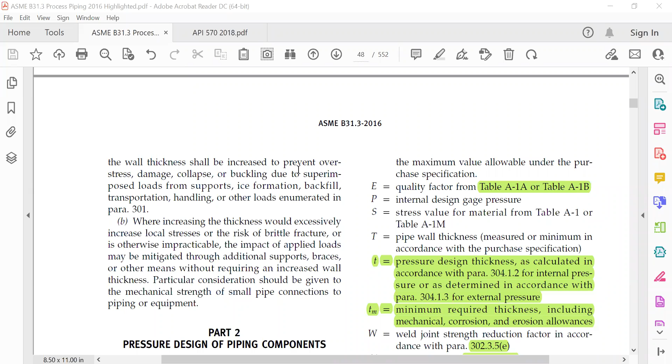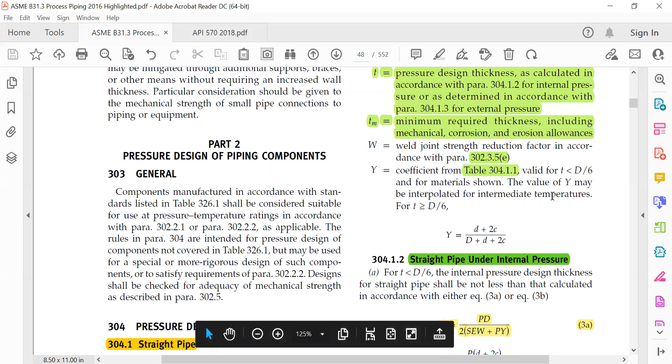B31.3 process piping, design of piping components. I will only discuss this as per API 570. I will not go further into more design details.

So for straight pipes, the required thickness of straight sections of pipe shall be determined in accordance with equation 2, that is Tm equal to T plus C. C is the sum of the mechanical allowances, thread or groove depth, plus corrosion and erosion allowances.

The minimum thickness T for the pipe selected, considering manufacturer's minus tolerance, shall not be less than Tm.

D is the OD of the pipe as listed in the table of standards, that is given as per code. What should be the OD?

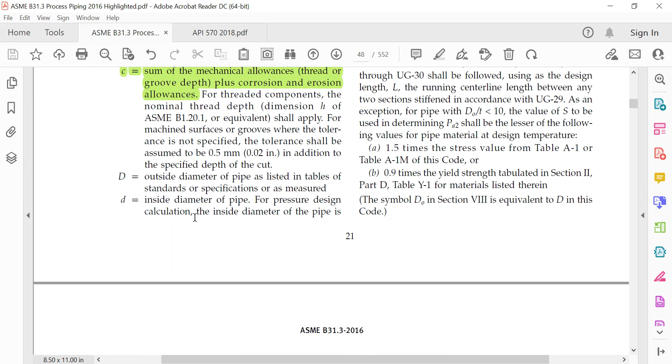d is the ID of the pipe. For pressure design calculation, the inside diameter of the pipe is the maximum value allowable under the purchase specification.

E is the quality factor from Table A1A or A1B, the quality factor for different types of pipes.

P is the internal design gauge pressure. Either you have to find it out, or it is given. If T is given, you find out P. If P is given, find out T. Depending on what should be the T and required T, you have to calculate from where everything will slowly follow.

But today I will mainly tell you the nomenclatures.

S is the stress value, and we can get all these things - stress value for material from Table A1, Table A1M.

A1 is for the American system, and M is for metric system. A1M means A1 for like KSI, and here it means for inch - it is for metric system.

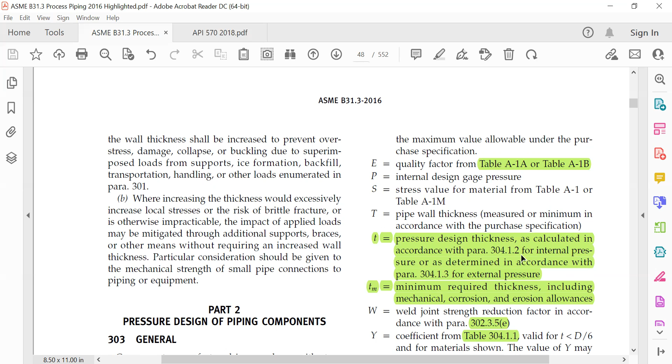Or as determined in accordance with para 304.1.3 for the external pressure. So this is 2.

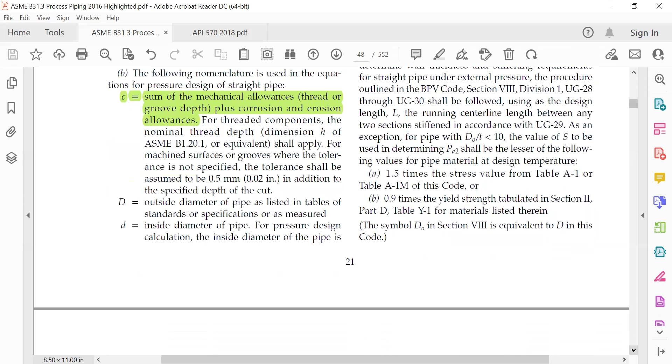We'll see what is in the external pressure - 1.5 times the stress value, so 0.9 times the yield strength tabulated in Part D. So for what we'll see.

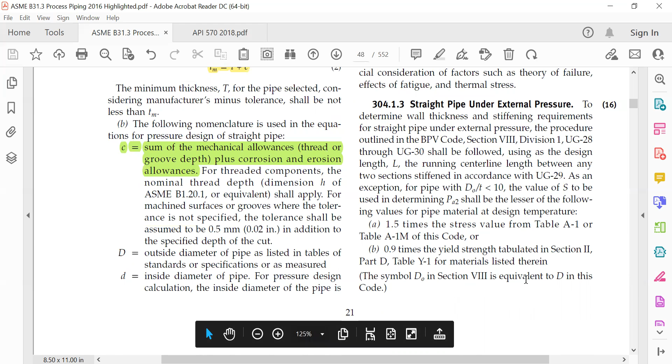Then what is Tm? Tm is, let's say, the minimum required thickness, including mechanical, corrosion and erosion allowance.

W is the weld joint strength reduction factor in accordance with para 302.3.5(e).

So if you see from here, you see here it is 47, or you see 20. So whatever you can remember depends on you, how you want to see it in the exam, because it is open book. Open book, you need all these things.

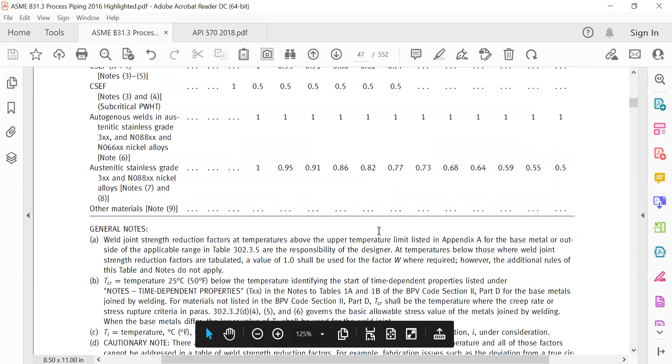You have to calculate it in minimum time. So it is up to you how you want to use it. Either you see that 47 or see this 20 and use it, because there is no F key you can use there in the exam.

It's Control F you cannot use. So weld joint strength reduction factor, that is W.

So it depends on what you are looking for and what is the temperature. There is temperature, if you see, and what is the material. And if it is in between, you can just add and divide, make it for the center. So that is what the code says.

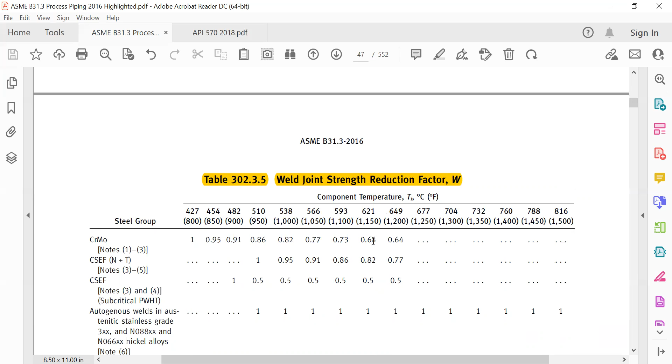This means using algebra only, like if it is in between this, so you can find a number between these two. Let us see - the weld joint strength reduction factor W may be determined using linear interpolation for the intermediate temperature values.

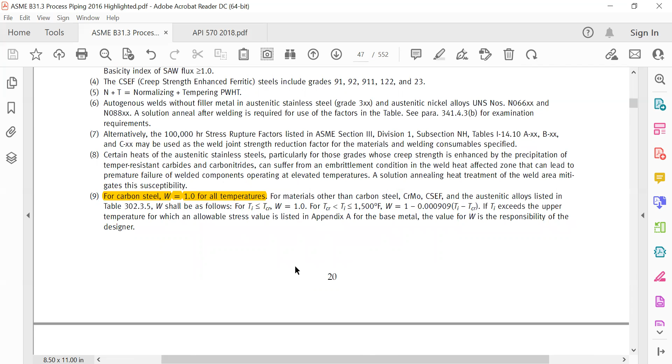For carbon steel, W is 1 for all temperatures. You don't have to see the table and all. If carbon steel is written, just put 1.

Y, the coefficient from table 304.1.1.

So you have to see Table 304.1.1, valid for T less than D by 6 for materials shown. The value of Y may be interpolated for intermediate temperatures, same as interpolated - so you can interpolate this.

For D, T greater than D by 6, Y equals D plus 2C over D plus d plus 2C. So there is a formula you have to use.

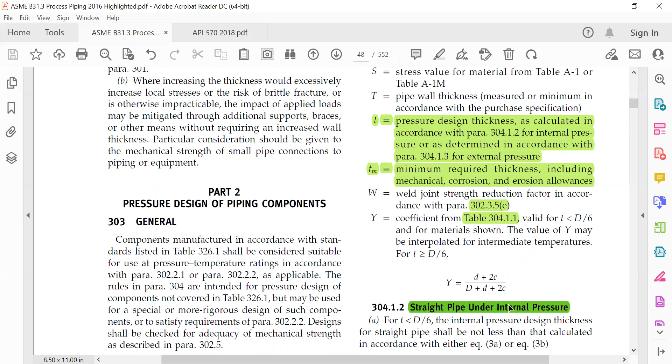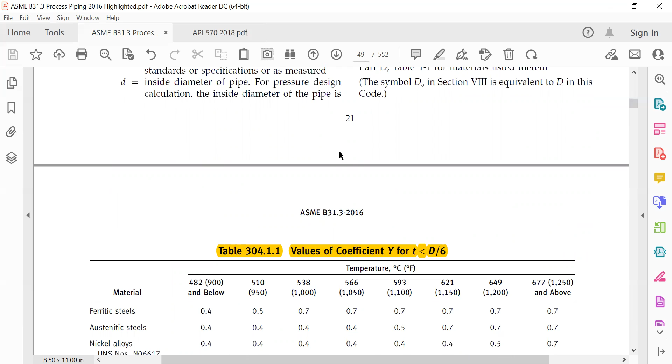So let us see this, 304.1.1. This one, the same 22, and this is 21. So 20, 21, 22, or 48, 49, 50, or 47, 48, 49. What you want to remember, that is up to you.

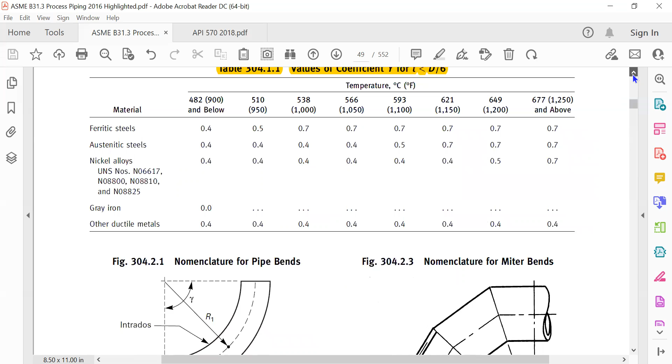So there is different materials, different temperatures, and you have value of Y, degree centigrade, Fahrenheit, everything given, less than D by 6. Other ductile metals, gray iron, nickel alloys, austenitic stainless steels, ferritic stainless steels.

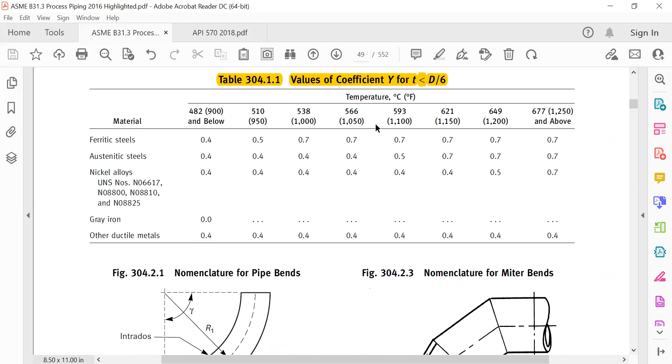So as per this, we have to put on these problematics. All problems can be solved with this formula here. Thickness or pressure. You need thickness, you need pressure. So you can use this formula only.

So T for T less than D by 6. Always you can find less than. It is very rarely greater than D by 6. So if it is greater than D by 6, then it is P by SE, greater than 0.385.

Calculation pressure design thickness for straight pipe requires special consideration of factors such as theory of failure, effects of fatigue, and thermal stress. For this, we are using this one, like T equal to PD by 2 SEW plus PY whole. So that is the equation what we have to use for our calculations.

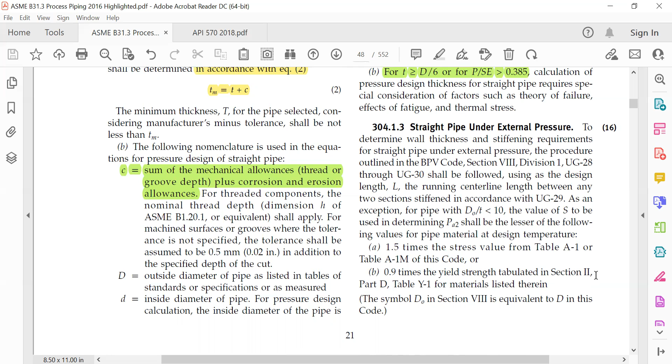1.5 times the stress value for table, take this, or 0.9 times the yield strength tabulated in Section 2 Part D. So this we are rarely using, but this is we are using very much.

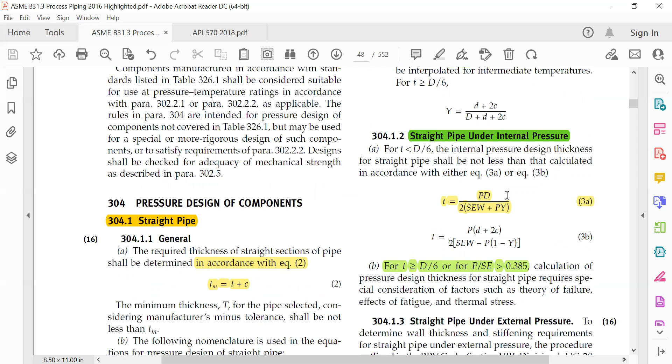Then where you get this S, let us see. E and S. So for E that is this table, and for S there is this table. So these two tables you have to follow. E is only quality factor, so...

Different seamless one, and there is other things there. So the page number you have to remember. I will just go there. I think the first one is this. So let us see.

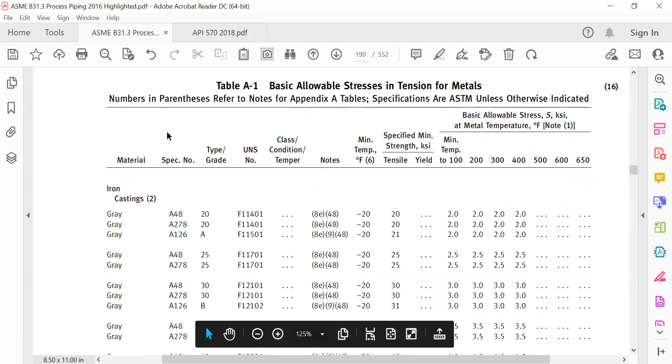Allowable stresses and quality factor for metallic piping and bolting materials. So it is starting from 182, but there is another thing also you have to see. Basic allowable stresses in tension for metals. So there are these are for castings. So if you are using casting, different things are there. For metals, this is A1.

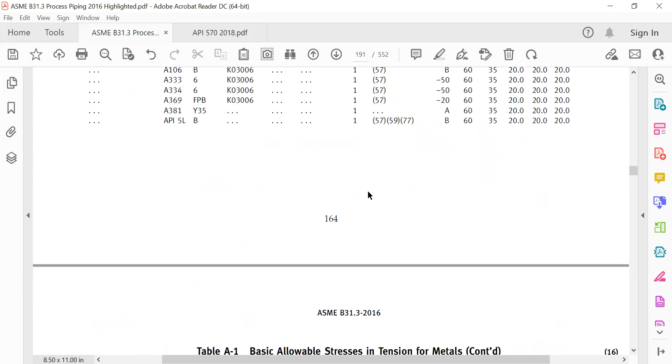So starting from 191, if you see here, or if you see here, 164, that is, you see time this, go to the next one. Basic allowable stress S KSI at metal temperature degrees Fahrenheit. So you can get in degrees Fahrenheit in KSI. So into 1000, this into 1000, what you get here as per temperature.

So there is a good thing about this here in this Fahrenheit scale. Now, this table is this here. It is written carbon steel and all this. The grade specification number. It's all this given, P number. You have to follow, and you find out something.

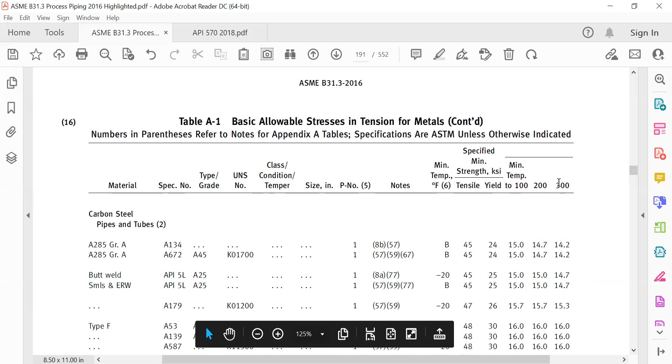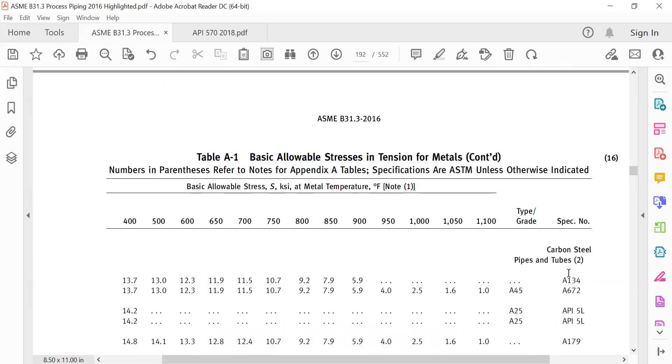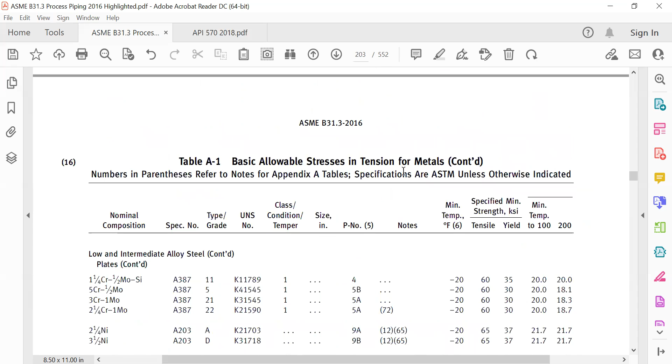Then the next is 200, 300. Then it is going for 400 here, and the same specification it is continuing, so that you can see there is a first page, there is a second page. Then you go to the next, MKS unit. So that is table A1M.

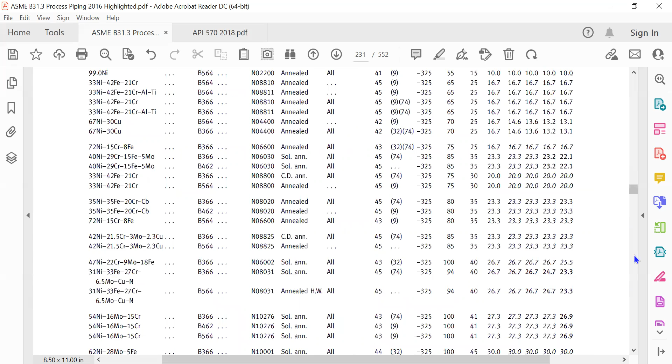So this is for basic allowable stress, tensile metals, metric. This is S in MPa, megapascal, in degrees centigrade.

This is in megapascal, basic allowable stress megapascal. So if you want to do Pascal, you have to do 10 to the power 6 and all.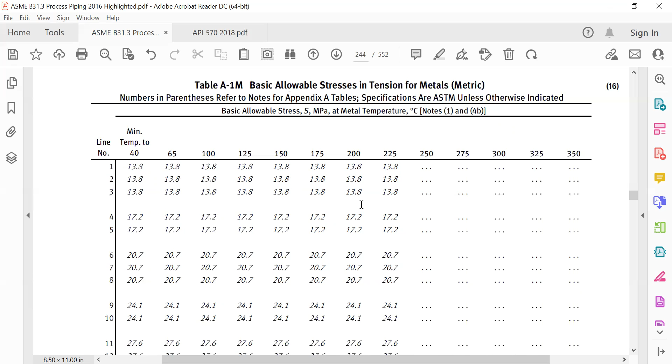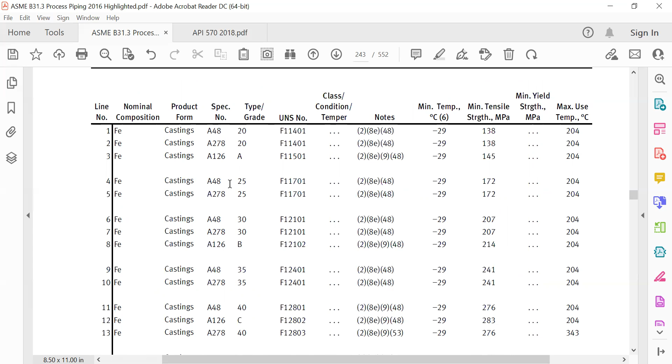See here the difference is something there, you can check it. Like we say start from here, 1. So this is for casting, but you can go on scrolling, then you get other things.

Like this is pipe and tube, you see. So there is 1 to all line numbers are there. So when you go to the next page, your line number will be there and other things you cannot find. That is the problem.

So minimum yield strength, minimum tensile strength, and the temperature. Maximum use temperature.

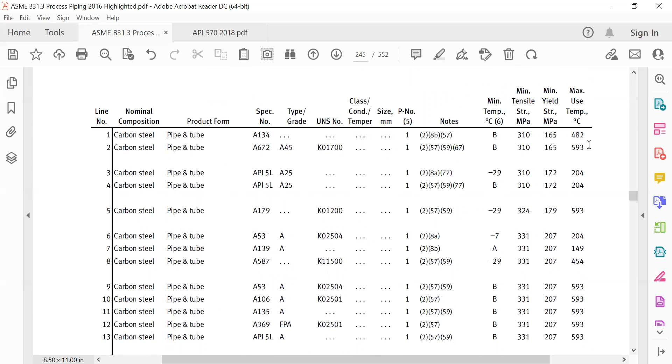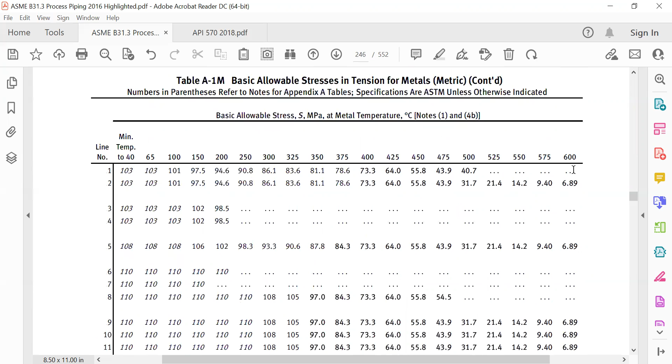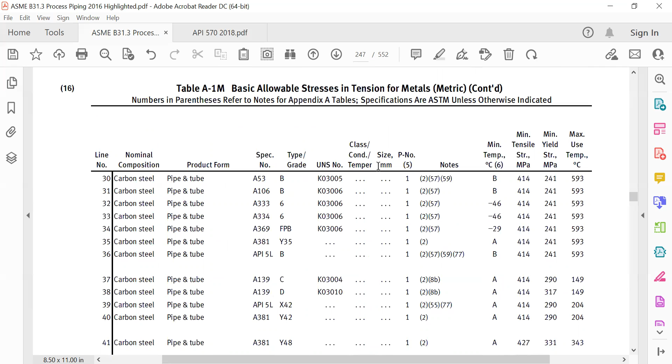So for that, if you go from here, same like that, page number means that serial line number 1, then you can search for these temperatures. Go on searching. So the next page you can see, so that is like that.

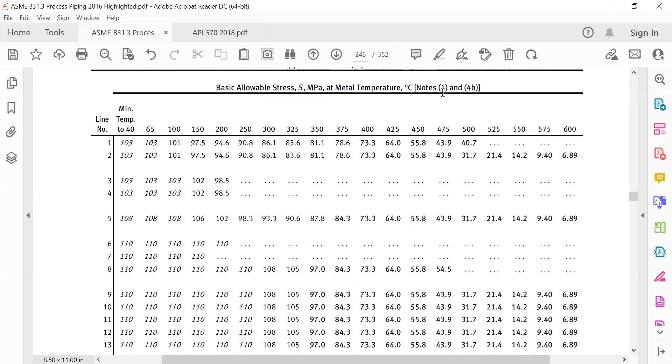So one page is for all nomenclature and all, and then the next page you go for finding out this MPa at metal temperature degree centigrade. So what you can use, you have to use...

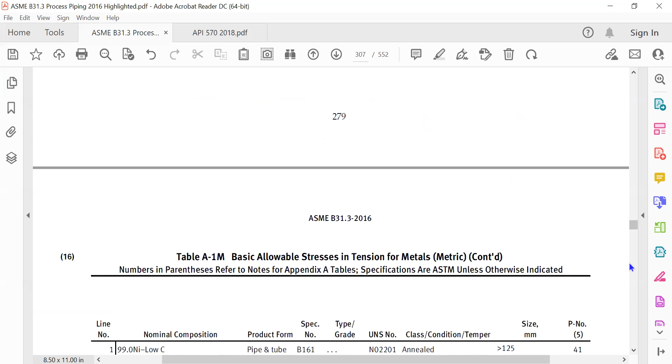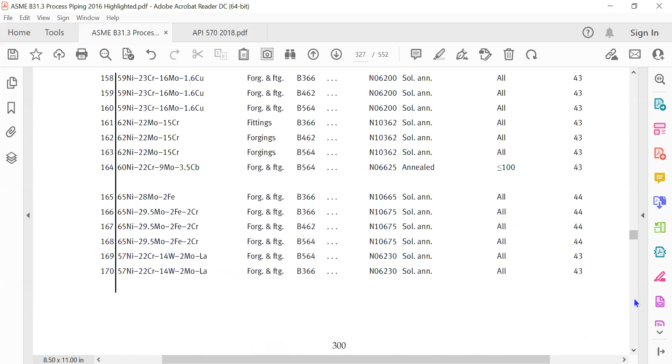So while we go through our calculations, we can understand better.

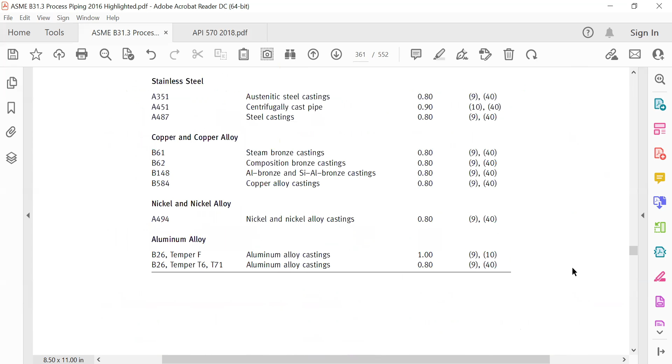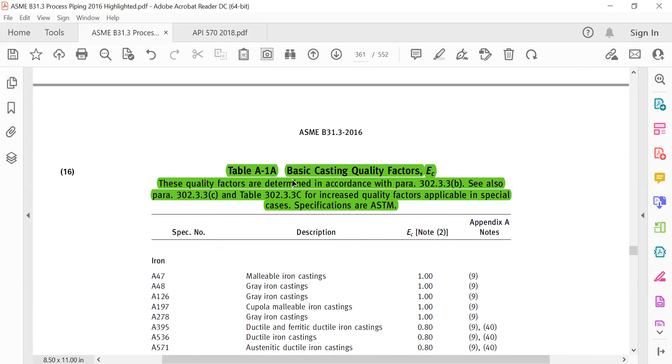There is basic casting quality factors, that is A-1A. You can read this page number 361, or you can go for 334. What you want to remember, you have to remember, so that it is easy.

So for me, it is better here. So once you remember, or write down to remember in the exam, it is better for calculation. Don't have to search.

And this is basic quality factor for longitudinal weld joints and pipes, Ej. For seamless, it is always one. So seamless pipe or anything, it is one. So don't have to bother with these things. But when electric fusion and all different grades, you look for that.

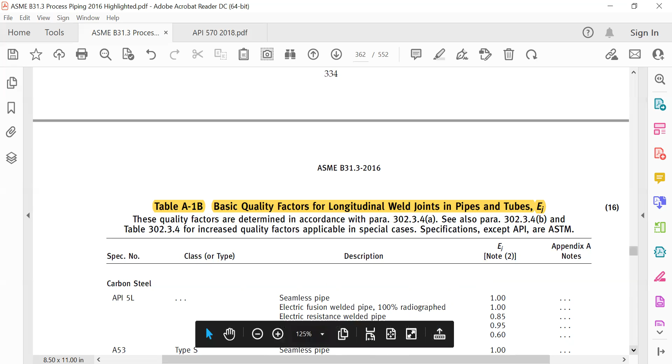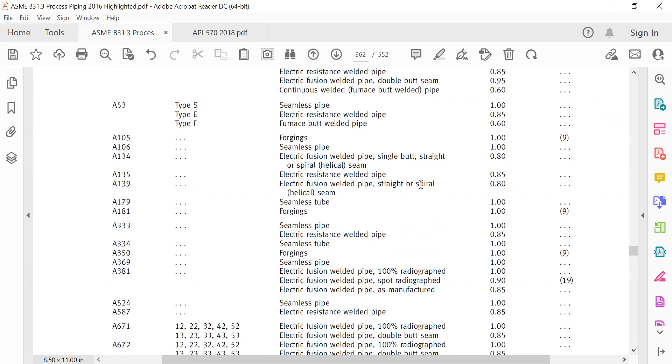So when you see seamless, it means it will be always one. Don't go for too much searching in the open book and all. So remember 361, and if you see 390, I think 391. Or 291, sorry.

So to find out all these things, and next we go for the other one. Let us not move too much around it. When we go...

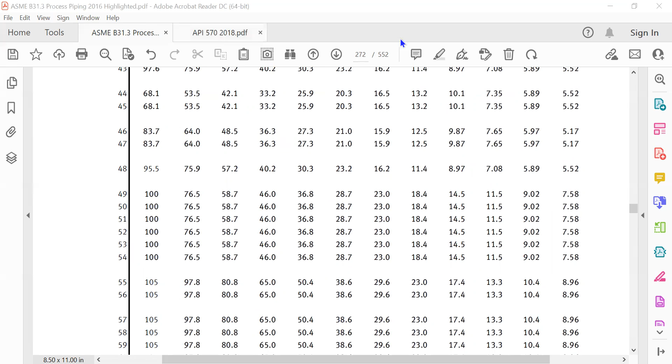Now we'll go for API 570, 2018. So here 7.1, 7. Inspection, data evaluation, analysis, and recording. Corrosion rate determination: the owner-user may use either the point-to-point analysis method or statistical analysis method, or a combination of both, to determine the long-term or short-term corrosion rates.

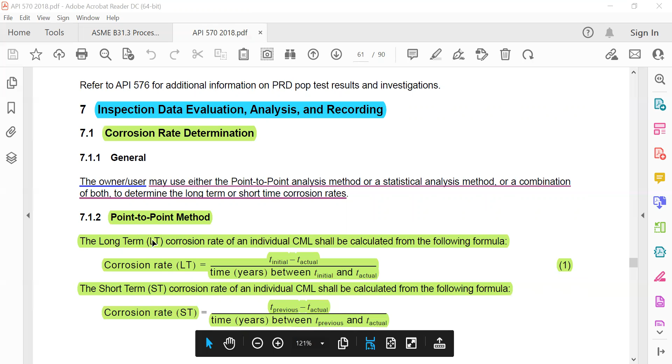Point-to-point method: long-term (LT) corrosion rate of an individual CML shall be calculated from the following formula. Corrosion rate LT is T initial minus T actual, divided by time in years between T initial and T actual. And this is long term, this is short term.

The short term is ST corrosion rate for individual CML, shall be calculated from the following formula: T previous minus T actual, divided by time in years between T previous and T actual.

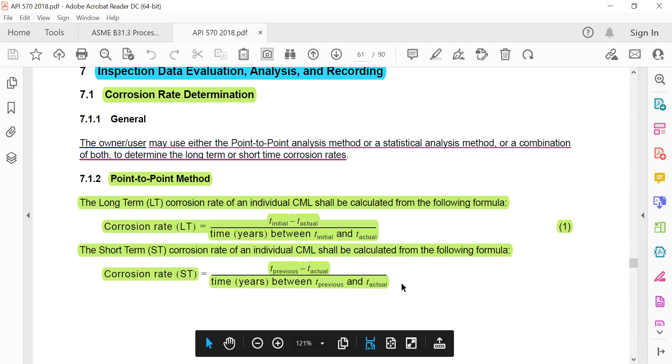T initial is the thickness in inches/millimeters at the same location as actual, measured at initial installation or at commencement of a new corrosion rate environment. T previous is the thickness in inches/millimeters at the same location as actual, measured during one or more previous inspections.

LT and ST corrosion rates should be compared to see which results in the shortest remaining life, as part of data assessment. The authorized inspector, in consultation with a corrosion specialist, shall select a corrosion rate that best reflects the current process for inspection interval determination.

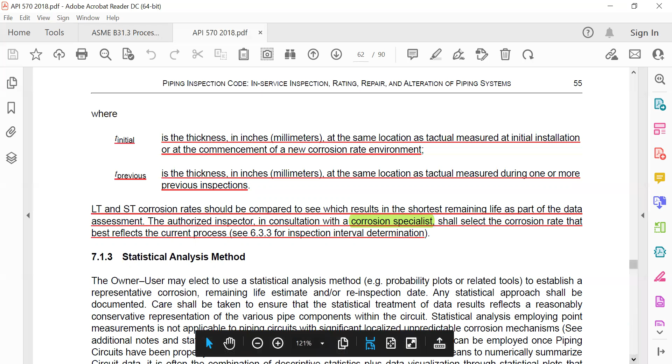Remaining life calculation. The remaining life shall be calculated from the following formula: remaining life in years equals T actual minus T required, divided by corrosion rate in inches or mm per year.

Where T actual is the actual thickness in inches/millimeters measured at the time of inspection for a given location of a component as specified by 5.7. T required is the required thickness in inches/millimeters at the same location/component as the actual measurement, computed by design formulas for pressure and structural requirements, before corrosion allowance and manufacturer's tolerance are added.